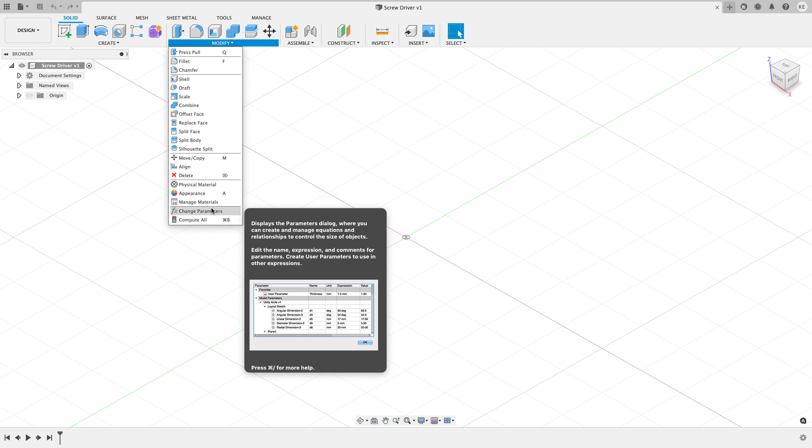Now I'm going to do a couple things before I get started. I want to create two parameters. From the modify menu, I'm going to choose change parameters, and when this menu comes up, I'm going to hit the plus. The two parameters I want to call are handle height, which I'll give a value of 2 inches, and shaft height, which I'll give a value of 2.25 inches. I'll hit OK. Now we really should add comments about what these do, but I'm going to skip that for the video, and I'll hit OK.

We'll reference those parameters later on in the design process. I know I'm going to have a handle component, and I know I'm going to have a shaft component, so right off the bat I'm going to start by creating components.

There's a couple ways you can do this. You can go to the assemble menu and choose new component. Because this is the way it's been done in Fusion for a long time, it's my muscle memory—a lot of times what I do is right click on my design name and choose new component. I'm going to use a standard component, and the name of this component is going to be handle. It's going to be underneath the parent, which is the design, and it's going to be activated once I hit OK.

The other thing I'm going to do right off the bat is go to the assemble menu and do an as-built joint. I'm going to click on the word handle in the browser, the component, and then the word origin. That's going to create a rigid joint between them.

Now I get asked a lot why I do that. Well, let's hop into another file. I'm just going to create a new component right off the bat, and I'm not even going to save it. If I draw something here, sort of like what we're going to do later on, let's draw a circle, and I'm going to extrude that.

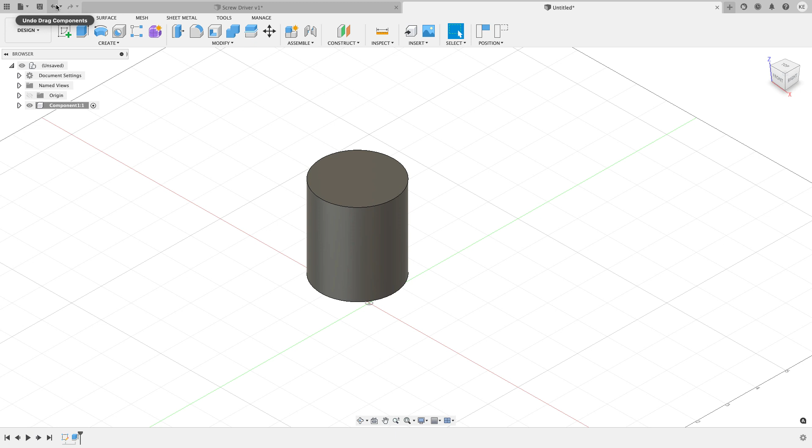When I do it this way, you can see that I can take that circle, this cylinder, and move it anywhere I want to. So I'm going to undo that and get it back to where it needs to be, revert that back. If I were to roll back to the very end and say assemble, and choose an as-built joint between the component and the origin, and then hit OK—that was the very first thing that I did.

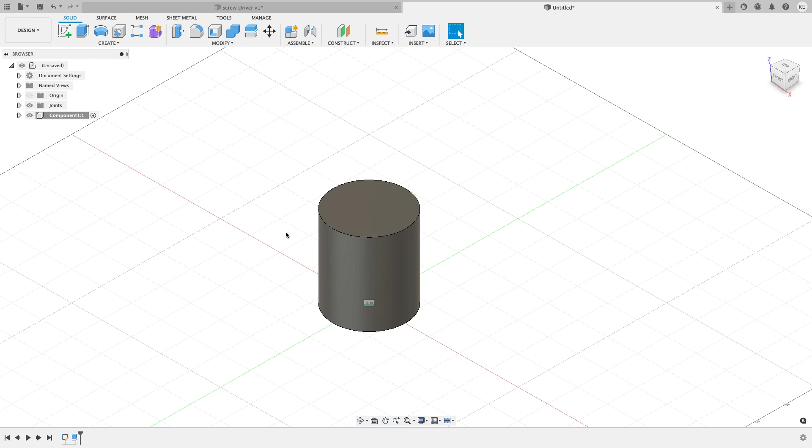Roll this to the end now. Now I can't move that cylinder anymore. So I know that the handle, I want it at the origin, so I'm just doing an as-built joint right away so that it can't move. I'll close this out and go back to my original design file. So I'm on my design file now. If seeing the joint symbol bothers you, you can turn off the joints folder, or you could turn off the individual joint that we just worked on.

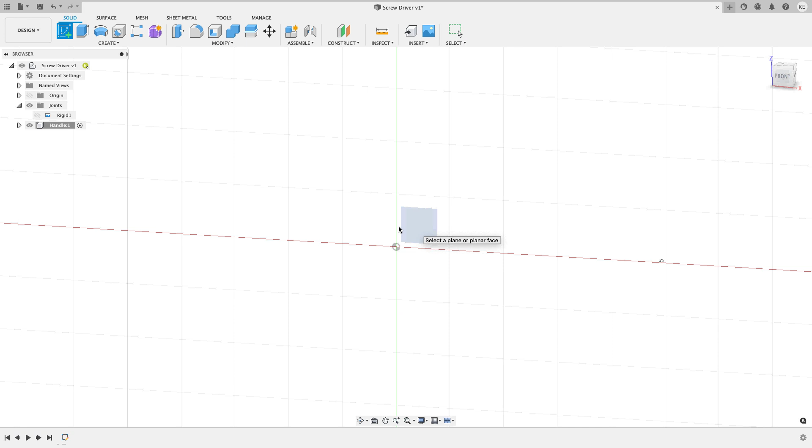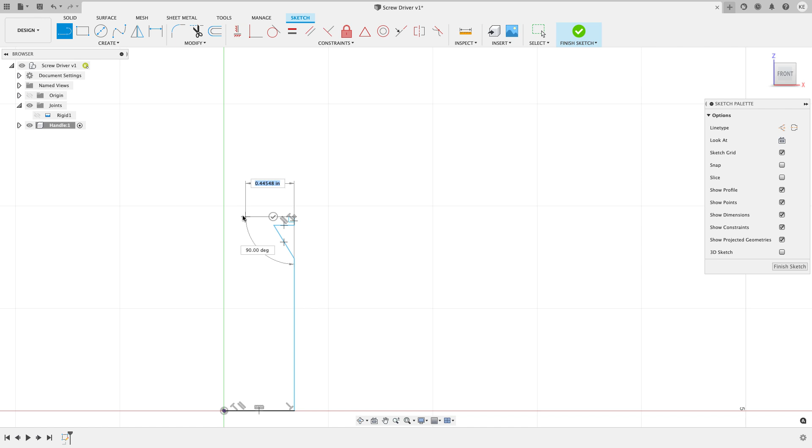I'm going to create a sketch now on the front plane, and we're going to work on drawing the handle shape. So I'm going to start the line command, and I'm just going to come over about that far, come up, angle in, angle back out, come straight up. Don't worry if you're not being completely perfect on these. Oftentimes I'll do what I just did there to close shapes up. I know I want this to be vertical when I'm done, but I drew it kind of as an angled line so that I visually can remember to come back and make sure to make that vertical. So I've got that taken care of—that's going to be my handle shape.

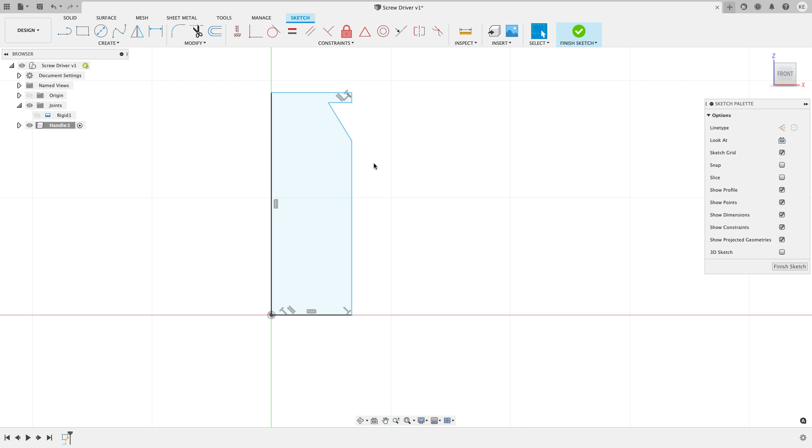I didn't do a great job on the sizing, but that's all right. We'll be able to fix all that in a minute. I'm going to start another line command, and this time I want to draw a center line, not construction, but center. So I'll go to the origin and just drag down, and that's going to make doing my dimensions a little bit easier.

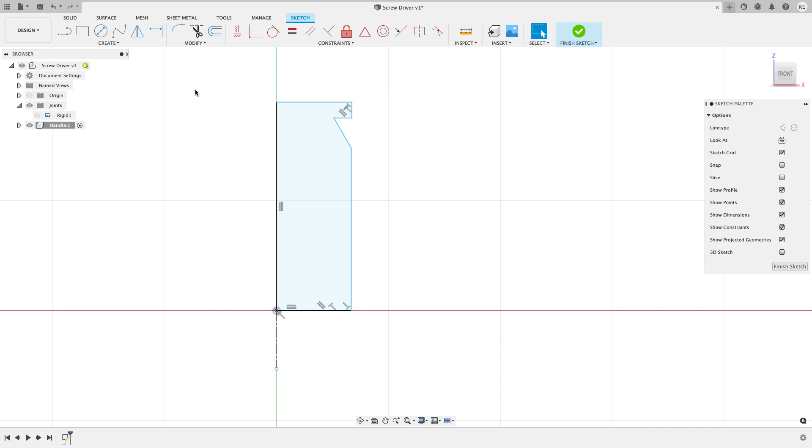Now I'm ready to start adding some dimensions. I'm going to start the dimension command, and I'm going to click on this center line and this outside dimension, and that's going to give me the total diameter of the part. I'll say that's going to be 1.125, and hit enter, and that creates my diameter dimension there.

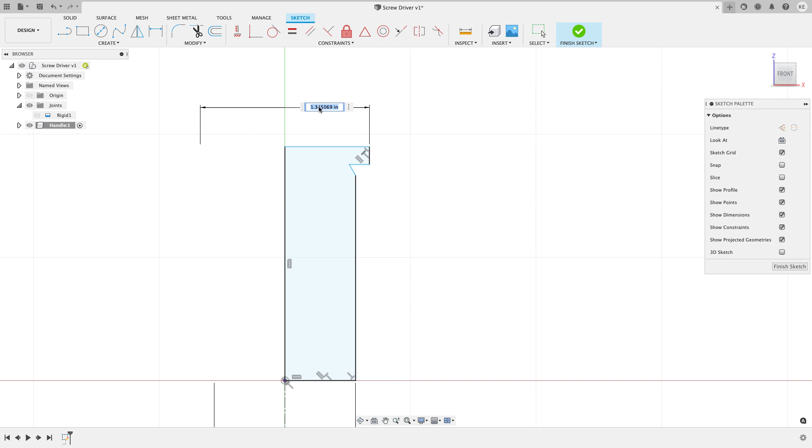I'll click on that center line again, and click on this upside dimension here, and call this 1 inch. So that gives me a 1 inch dimension. You see that things are sort of flipping around. That's okay. I'll just drag this in a little bit, and that's probably where I should have been a little bit more careful on getting the scale right on this. But you can see it wasn't too big of a deal.

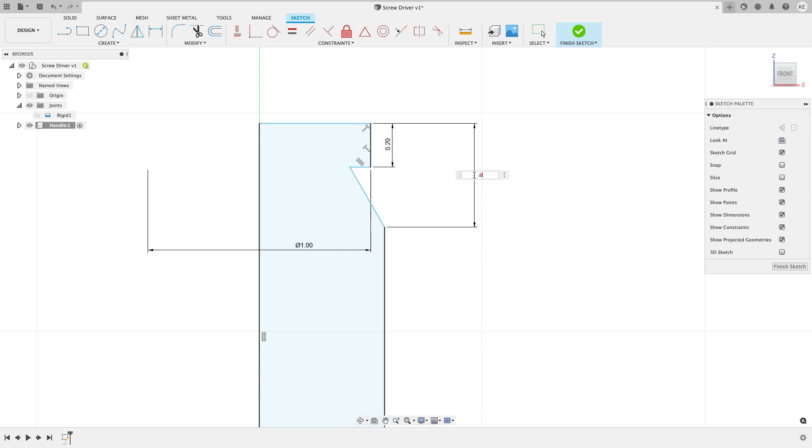So I'll dimension this to be 0.2 inches, and I'll dimension from here to here and call this 0.625 inches. Every time I move this around, it's just going to come back with the next dimension, so I should have probably just left it, but you get the idea.

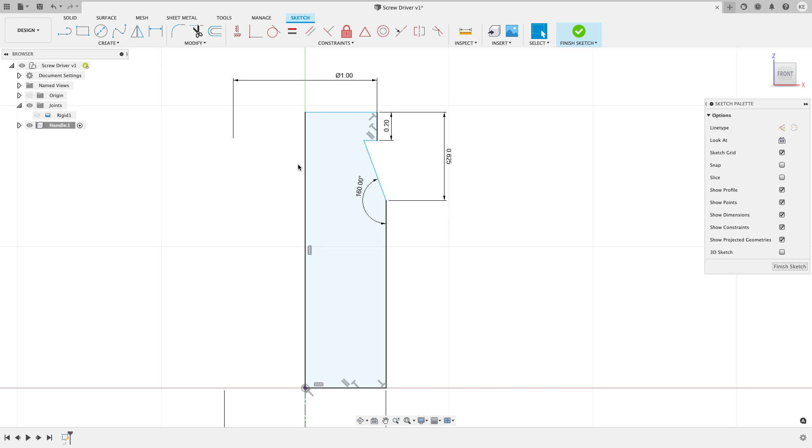I'm going to add one more dimension between here, and call this 160 degrees. And then I'm mostly done. The only place I have left is to define the total height, and I'm going to do a dimension here, and click that, but instead of typing the dimension in, I'm going to call this handle, and reference that handle height parameter, and hit enter.

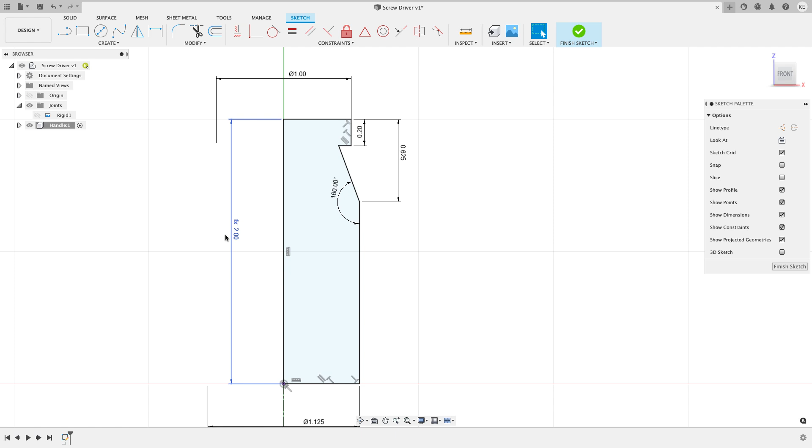Now that I've got all my dimensions on here, I can move these around and clean them up should I want to, kind of move them and reorganize them. I usually leave this step for the very end. So there's my original handle design. I'm going to go ahead and finish my sketch, go to a home view, click on the Revolve command, and choose my center line as my axis, and I get the basis of my handle so far.

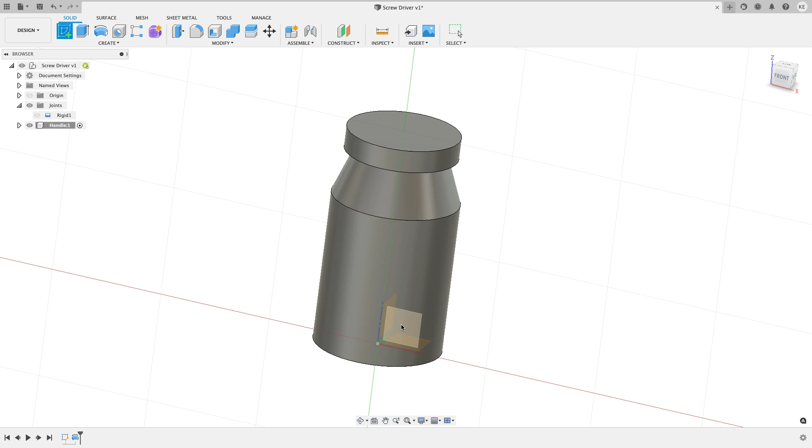Okay, for step 2, I'm going to put a little rounded corner down here, so I'm going to add a sketch, and put that sketch on the front plane. Once I get on the front plane, I'm going to slice this. Now I'm seeing wherever the solid body meets the plane that I put my sketch on, but I can't reference any of the lines. If I start the line command, it's not picking up on any of those edges. So I have to project those edges into my sketch first.

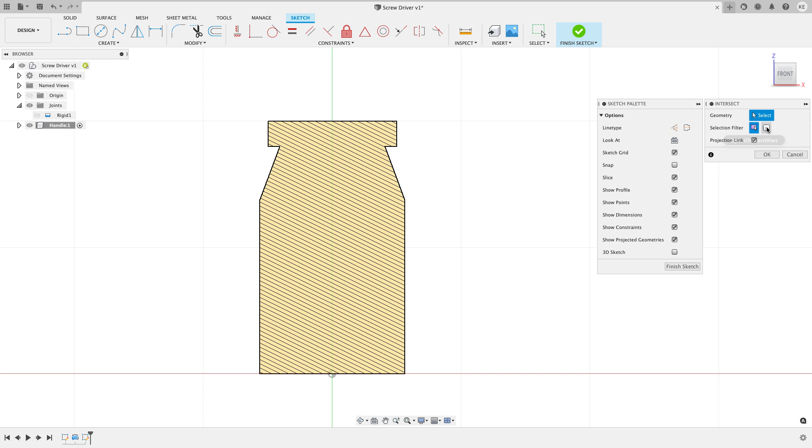So from the create menu, I'm going to go to project include, and this time I want to use the intersect option. In the filter over on the right, I want to change it from specified to body. So I'm going to go and change bodies, and I'll just click OK. And now what's happened is Fusion has projected in the outside profile of my handle.

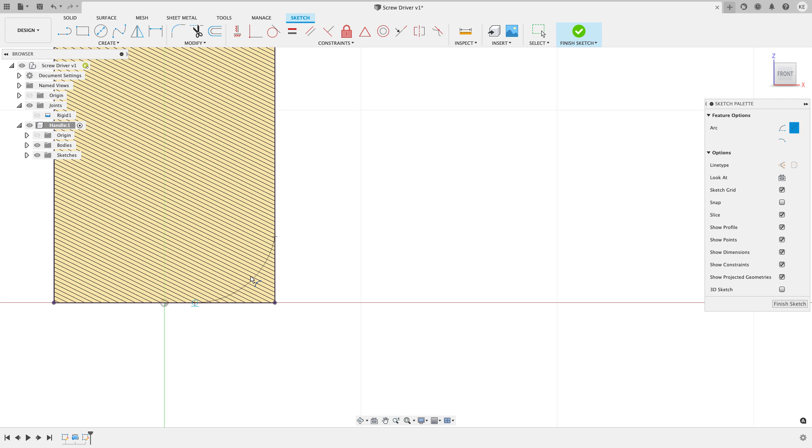And that allows me to go create an arc, a 3-point arc. I'll click on this bottom line and somewhere on this edge and kind of pull down a little bit. I don't want to see that tangent symbol there. I don't want a tangent symbol right there. This isn't going to be a perfect tangent on each edge.

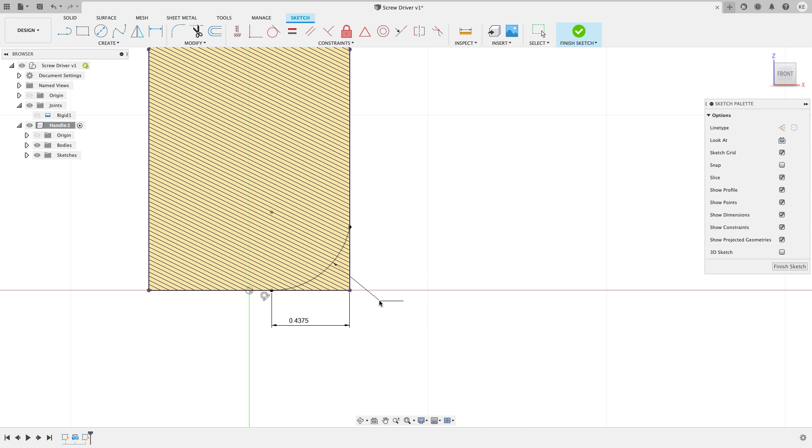So I'll add some dimensions now. The dimension that I want is going to be from here to here, 0.4375, and the radius is going to be 0.75. It turns fully black and constrained because there's only one arc that can be tangent to this bottom line, have a radius of 0.75, and a distance of 0.4375 away from the edge.

Now, a lot of times what we would do is we'd finish the sketch and do a revolve. There are 2 closed profiles that Fusion could choose between, so it can't automatically make the choice for me.

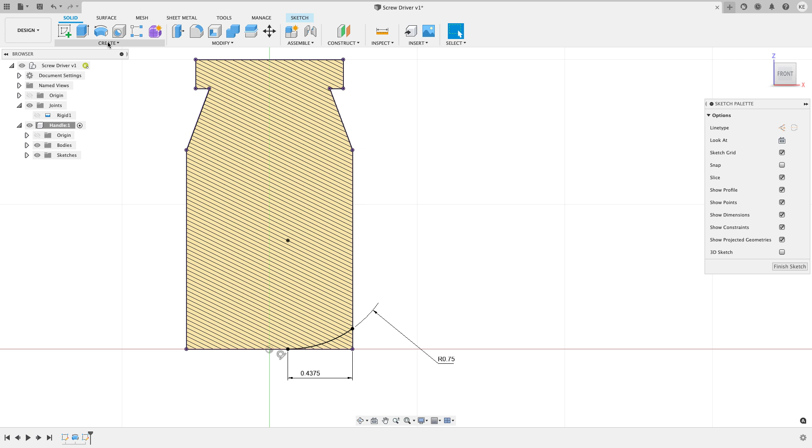Sometimes I'll go right to the solid tab, even though I'm still in a sketch, and choose the revolve command. Now it makes it really easy to grab that profile right there. Then I'll choose my axis, which I could choose the blue axis, or any solid round face will work.

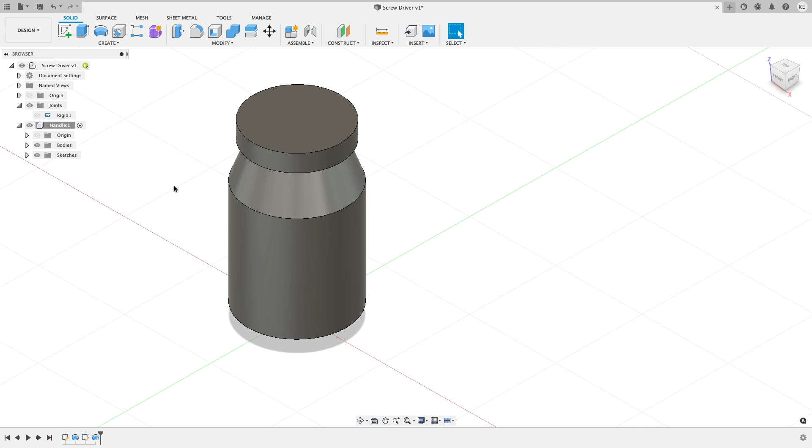That gets my cut, and I'll hit OK. Now I put a little cut around the bottom. To make my life a little easier, I usually try to leave fillets and chamfers until the very end, but I want to knock the edge off of this. So I'll go to the modify menu and choose the fillet command, click on this edge, and put a fillet radius on that edge of 0.25. We'll hit OK. My handle's starting to take shape pretty well.

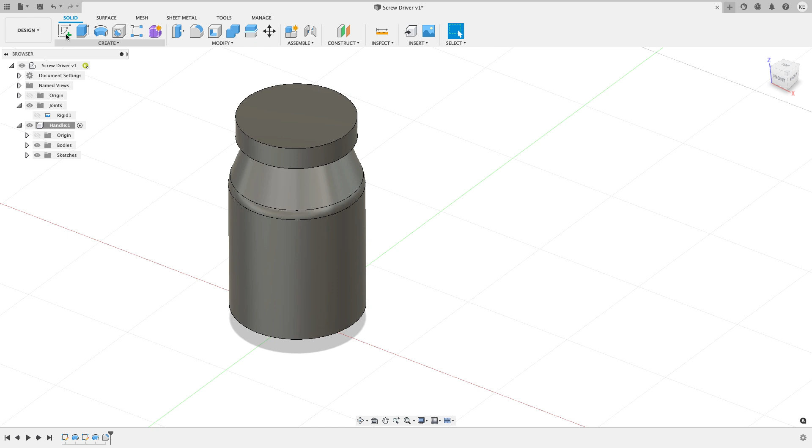I've got some holes that I want to put, kind of some little grips on the handle. So I'm going to put a sketch up on the top face, and I'm going to do a circle, but I want it to be construction. I'm going to start from the origin, and this diameter of the circle is going to be, I think, 2 inches.

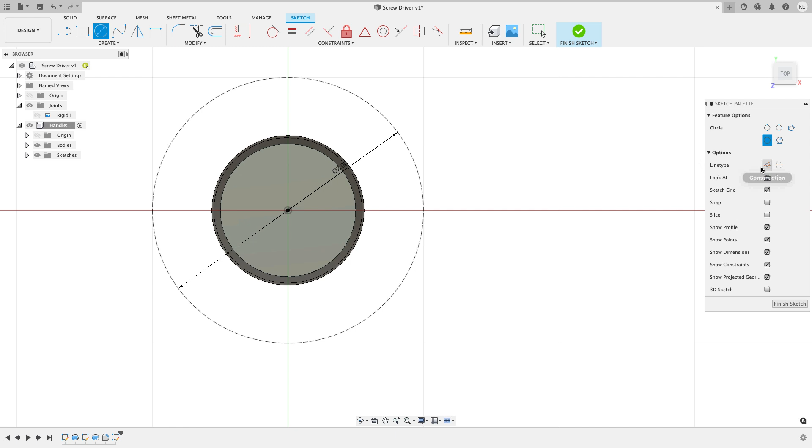So I'll put a 2-inch circle there. Then I'm going to come over here and draw another circle somewhere on the construction circle, but I don't want this one to be construction. I'm just going to drag this out - I'm not going to dimension it, just make it that size. The reason is that the dimension I've been given is a radius dimension, and I can't add a radius at the same time as I'm creating the circle. So now I'll right click and choose radius, left click to place it, and type in 0.5. Now I have my 0.5 inch circle.

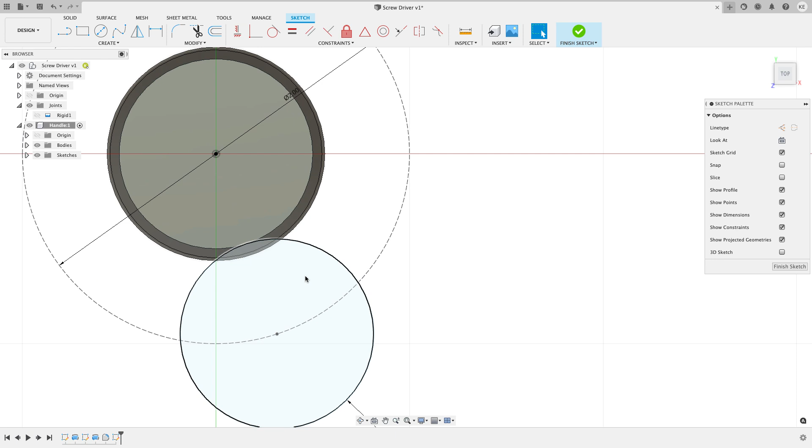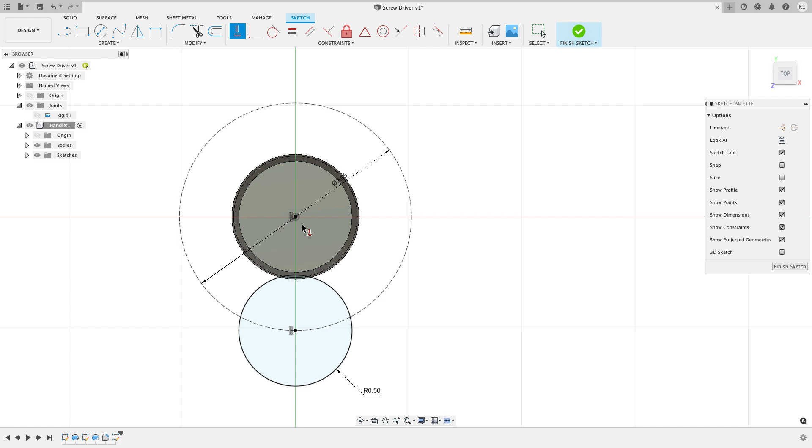I probably need to change the diameter of that a little bit - I don't want that to interfere with the top edge. So I'm just going to call this 2.05, let's go just a little bit larger. See, now it's outside of that. I'm going to add a horizontal vertical constraint between the origin and the dot in the center. Now that moves it into place, and you can see that everything is lined up where I want it to go.

I'll finish my sketch and rotate slightly. I'm going to extrude this circle, pull the direction I want to go until it starts to intersect, and then say I want to go through all. Hit OK, and there's one of the grip cuts that I'm going to have going through my handle right there.

Now I'm going to add a couple more fillets here, at least one more to start out with. So I'll fillet this edge, and that fillet radius is going to be 0.05. Now we've got a nice fillet going around there.

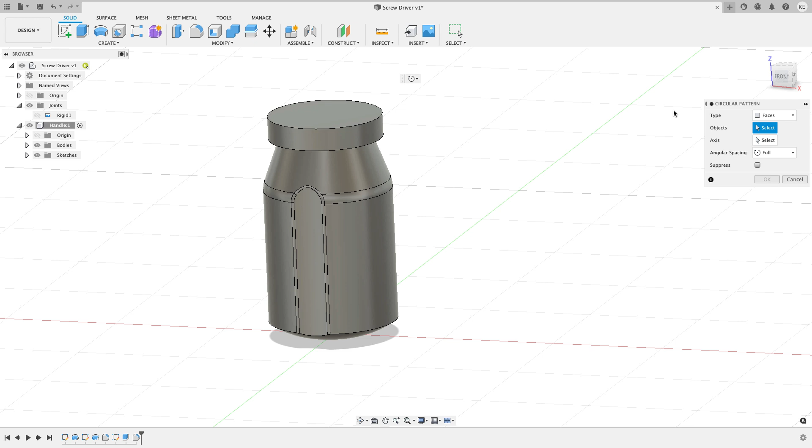I know I want 6 of these grips in total, and I don't want to do that 6 times. So instead, from the create menu, I'm going to choose to do a pattern and a circular pattern. Right now my feature type is set to faces - I gave the answer away there - I want it to be set to features.

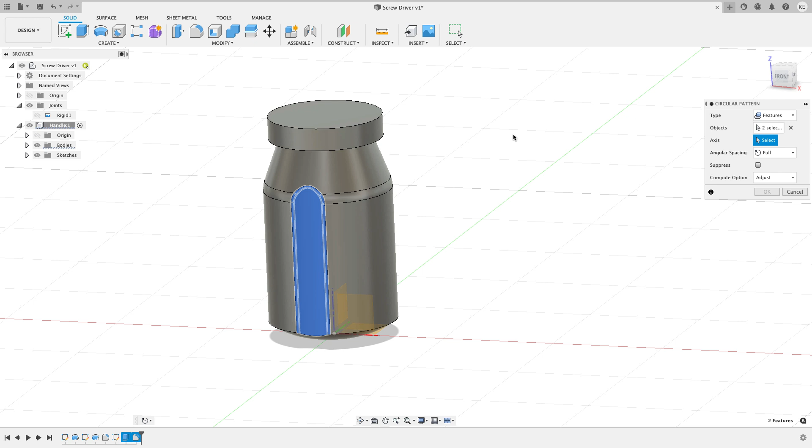So I'm going to select features, and I can click those features on the model, or select them from the timeline. I'm going to select mine from the timeline - you can select yours however you want. Again, for the axis, I just need to click on some round face, so I'll click on that edge and tell Fusion I'd like 6 of those. We'll hit OK, and now we get the fillet and the cut for the grips going around.

I'm going to do one more fillet across this, so I'll choose fillet one more time. I'm going to grab this bottom edge right here, and call this 0.025 just to round that corner off a little bit, and I'll hit OK.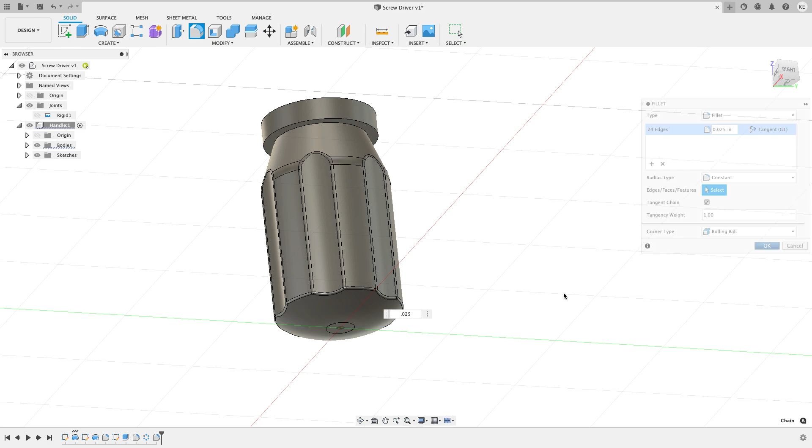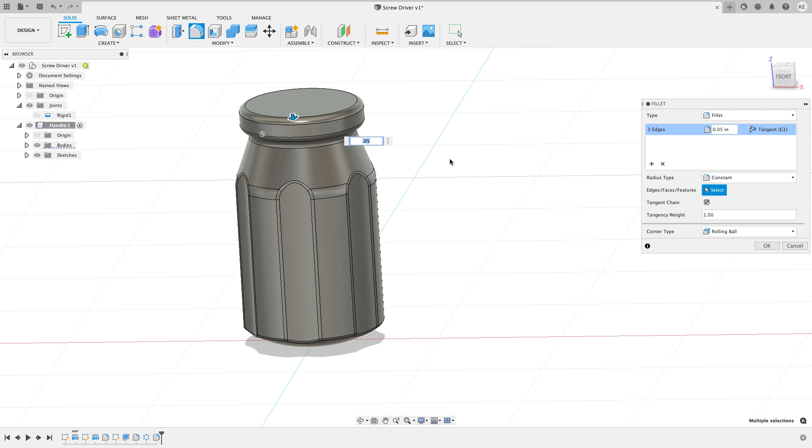And now I get all those edges rounded over. We'll do a different fillet radius. I want to grab this underside, this edge, and this edge, and give those a fillet radius of 0.05. You can see I get a pretty aesthetically pleasing shape right there, I think. So we'll hit OK.

And click on my home button. Really, one of the last things I want to do to this handle is put a hole in it where the shaft is going to go. So I'm going to use the hole command to do that.

I'm just going to click somewhere on this face. Now again, a lot of times what people try to do is they try to click right at the center. I'm going to encourage you to try to click off of where you want the hole to go so you can easily move the hole where you do want it to go. So I'll click right there. If I click on the blue dot, a white dot appears in the center. I'll drag those two together, it kind of snaps together, and now I can go start answering some of the questions.

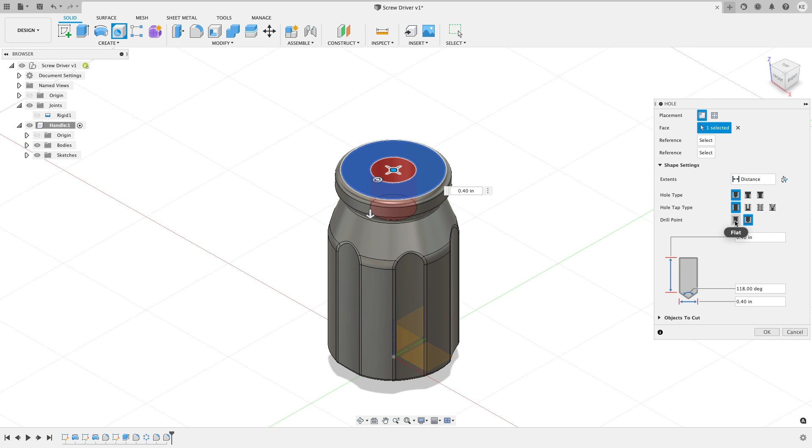I want the bottom of this hole to be flat, so I'm going to set that to be flat. And I want the depth of the hole to be 0.75. I'm also going to set the diameter of this hole to be 0.125.

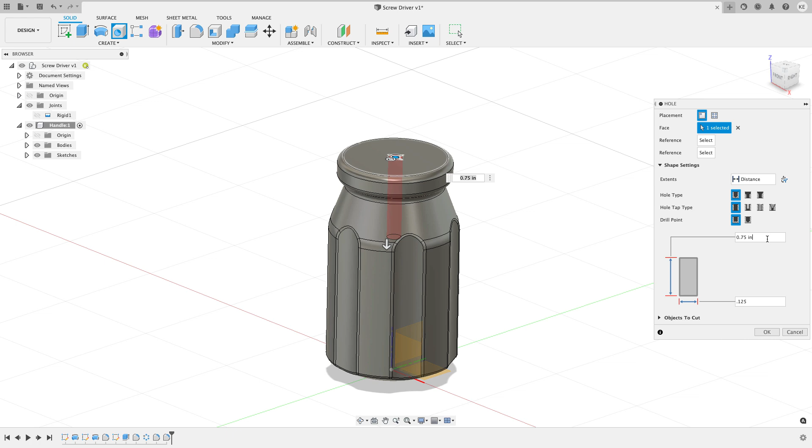So there's my 0.75 deep. That actually looks a little on the deep side, so let's just come and change this to be like 1/2 inch deep. That should be enough. And I'll hit OK.

So that's the basics for the geometry of the handle. Now, one of the things I note a lot too when I'm seeing things out on YouTube or Instagram or whatever is all the models are always gray. Our models don't always have to be gray. We can give them colors.

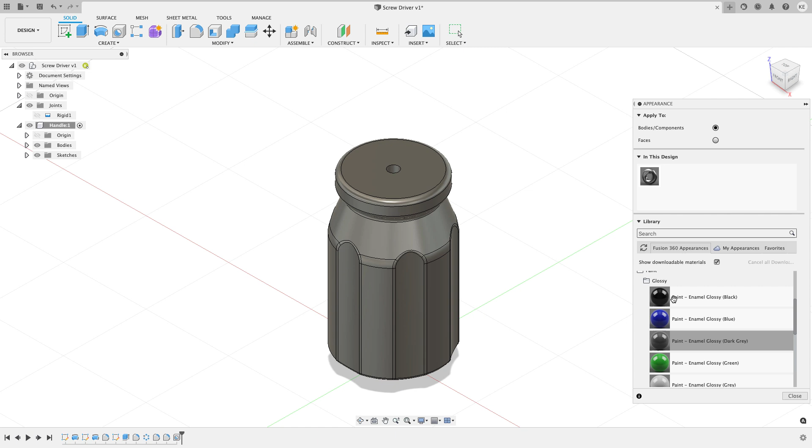So I'd like to change the appearance of this model by going to the modify menu, and then choose appearance. When this comes up, I want to go find any appearance that I want. I'm going to use paint for this, and I think I'll go to the glossy. I can drag any color that I want onto my handle, so I'm going to grab this yellow color and drag it on. Now you can see that my handle changes color to match.

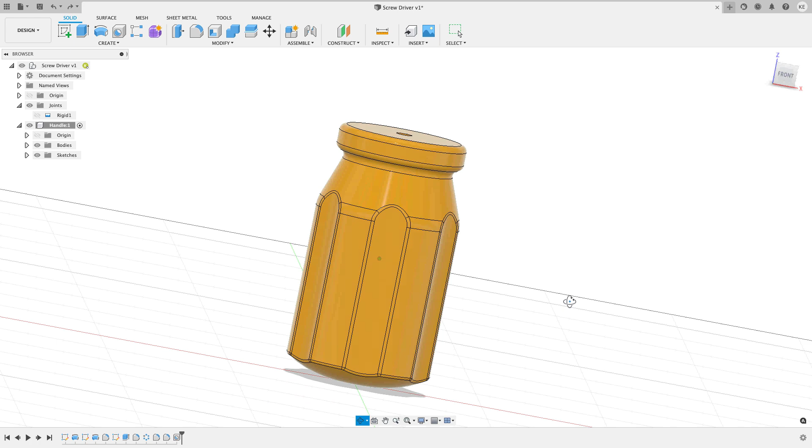I can give individual faces colors if I want to, so I just switch my selection filter to faces. If I really wanted to, I could go drag a color onto an individual face rather than having it applied to the entire body. I'll just undo that, I don't want that one face to be colored. So there's our handle. Handle's good.

Now it's time to start working on the shaft. So I'm going to activate my top level design again, and this time from the assemble menu, I'll say new component. This component is going to be named shaft. I'll hit OK, and now I'm ready to start doing some sketching for this.

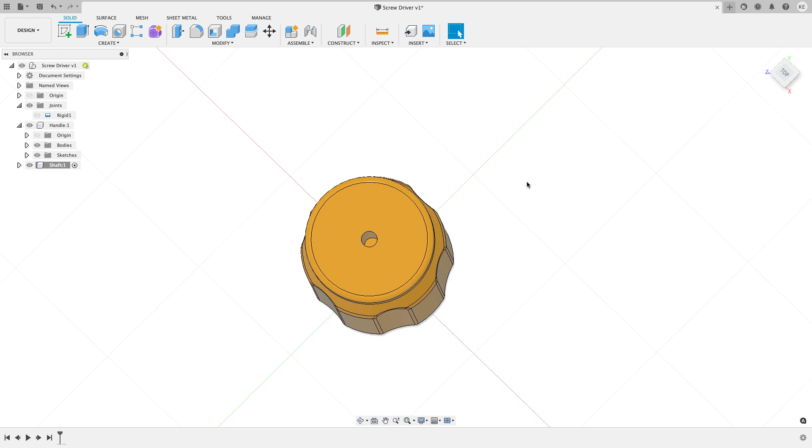So I'm going to create a sketch on the face at the bottom of that hole right there, and once I get that done, I'm going to finish my sketch. And now I can just extrude that, and I'm going to give this a shaft height dimension. I'll hit OK. So I've just created a relationship between the screwdriver shaft and the handle itself.

The handle is driving the geometry so that the shaft always fits in the handle. But again, if I click on the shaft and I drag it, it can move around anywhere it wants to. So I'm going to revert it.

I'm going to go to the assemble menu one more time and do an as-built joint. An as-built joint means that this thing is drawn exactly where I want it to be. There's no need to move it, it is where it needs to be. So I'm just going to click on the thing that can move, and then click on the thing that can't move. I'll click on the shaft, and then click on the handle, and it's going to add a joint between those two.

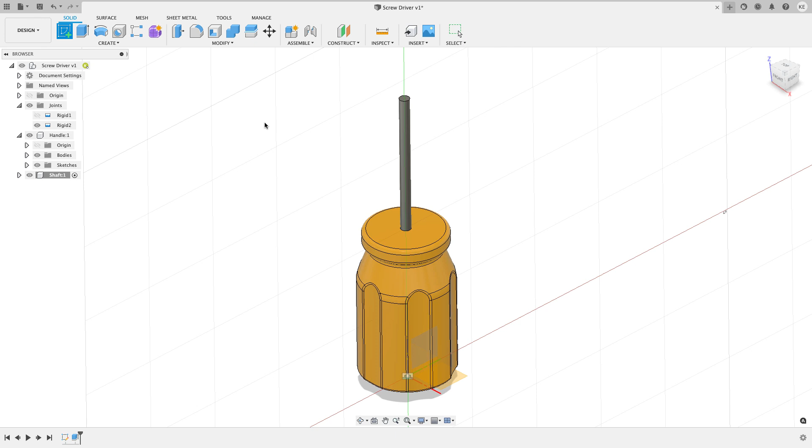Now I can't move that around anymore. I want to put a point on the end of the shaft, so I'm going to create a sketch on the front plane. Once I get that located, I'm going to slice my geometry. I'll go to create, project/include, intersect, and it should already be set to bodies from last time. I'll click on this and hit OK.

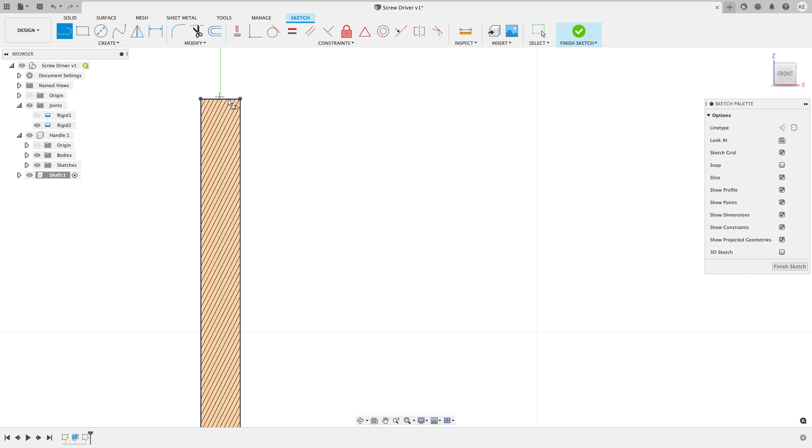Now for this, I'm just going to draw a line from the edge and down. The only place I don't want to be is exactly at the middle of this line, so you see I'm off by a little bit. I want the distance from the center point of this edge to the end point of that line to be 0.010 of an inch.

Now that's a little tricky because there's nothing there that I can dimension to. So what a lot of people will do is come and put a point, or draw a line and use the midpoint. There's maybe a faster way you can do this that's more automated.

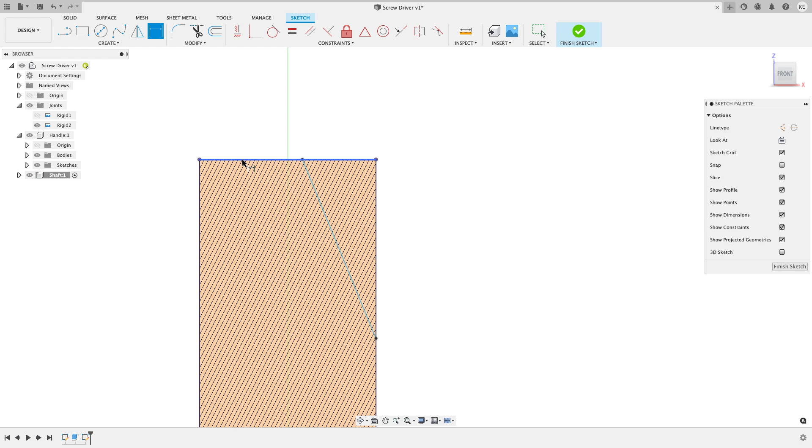I'm just going to start the dimension command and hold down my shift button as I scrub along this edge. Eventually Fusion will find the midpoint. I'll click on there and click on the endpoint of the line, and set this to be 0.01 — 0.01 is what I meant. Fusion will automatically add that point for me, and put it at the midpoint all in one shot. I didn't have to do anything to make that happen. It just sort of did.

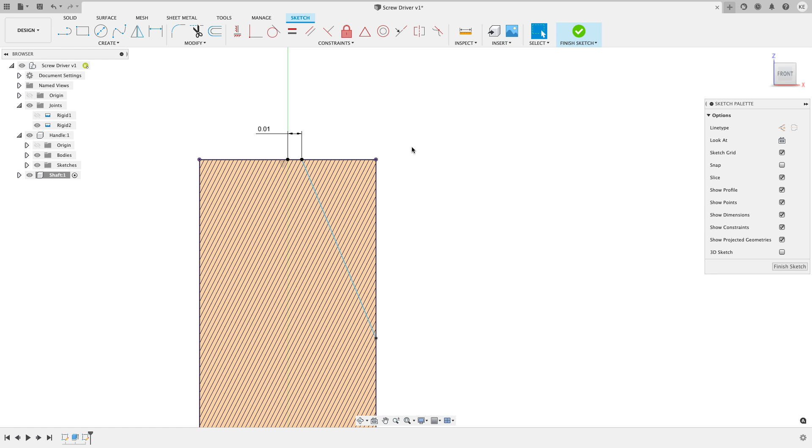I have one more dimension that I have to do. I'm going to hit D for dimension to get into the dimension command, click on that point, and that value is going to be 0.125. That's going to be fully black and defined.

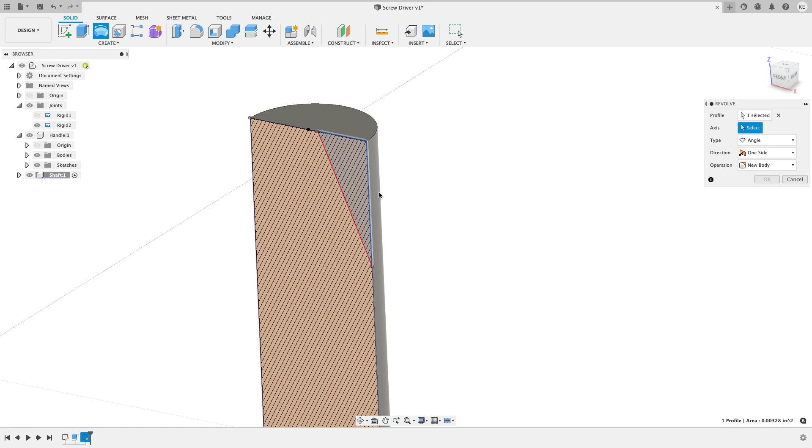Again, if I want to, I can just go back to the solid tab, choose a revolve command, pick my profile, pick on my outside face, and Fusion's going to rotate that around and cut the end of that. So we're starting to get a little closer to the shape of the screwdriver that I want.

I'm going to put a sketch up on this top face. Now what I want to do is draw the cut where this is going to go into the bit. There are a couple of different ways we could do this, but I'm just going to kind of draw a triangle.

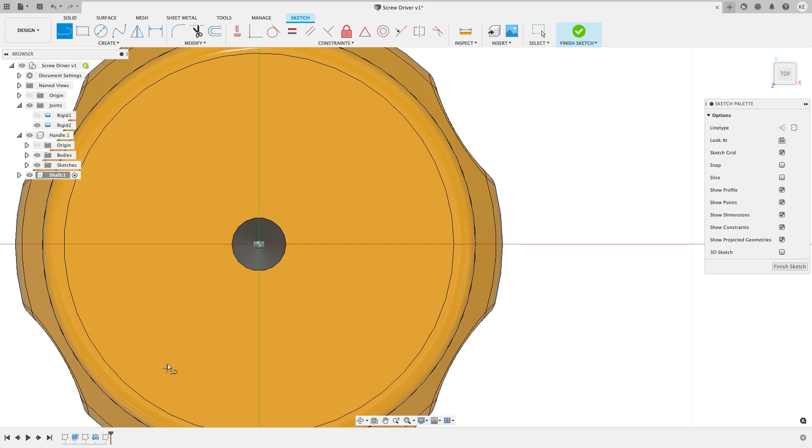So I'm going to bring a triangle in. When I get to where I want this to end, I'm going to have a radius end on it. I'll left click and hold, and swing into an arc. Don't worry that our arc is really large compared to what I want right now — I'll just kind of drag this back out. I know this is going to go down pretty far, so I'm going to drag both sides back out.

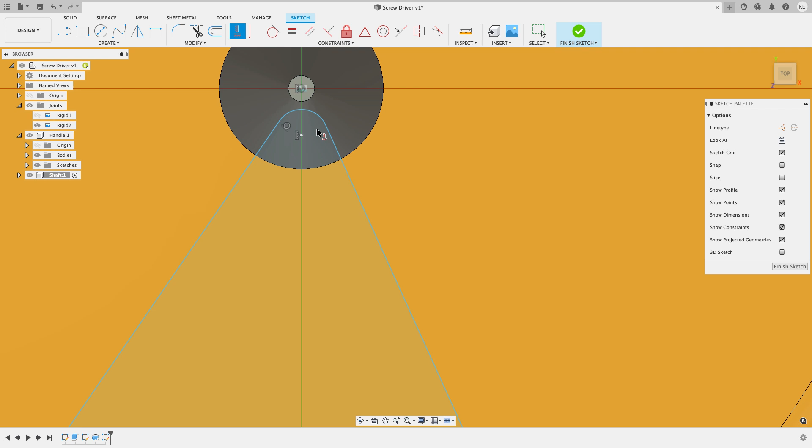Then I want a line that connects them. I don't really care if it's horizontal or vertical right now — I'll fix that with a horizontal constraint to get that where I want it. I know the center of this is going to be lined up with the origin, so I'm just going to put that on there now. I fully expect... I thought it would have broken a little bit more, but it stayed together pretty well.

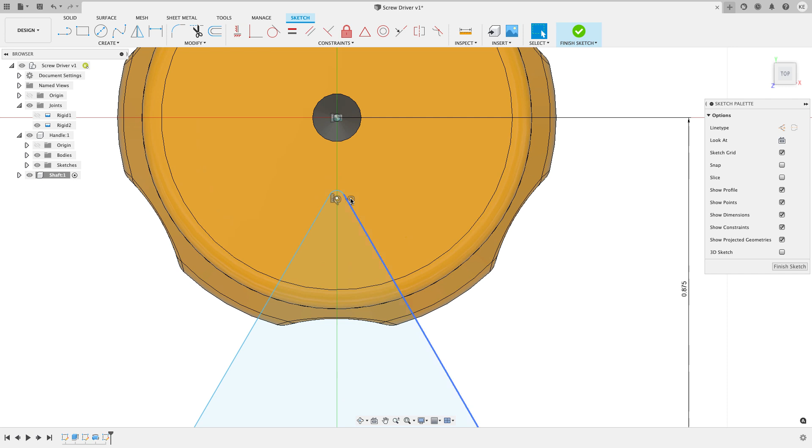I also know I want a tangent constraint right there. So we're good there. I can just start dragging these things around a little bit to get it more into place. I'm going to add a dimension — D for dimension — between the origin and the bottom line here, and that dimension is going to be 0.875. That moves things around, but I can just drag things back if I need to, grabbing the whole thing and moving it closer to where I want it.

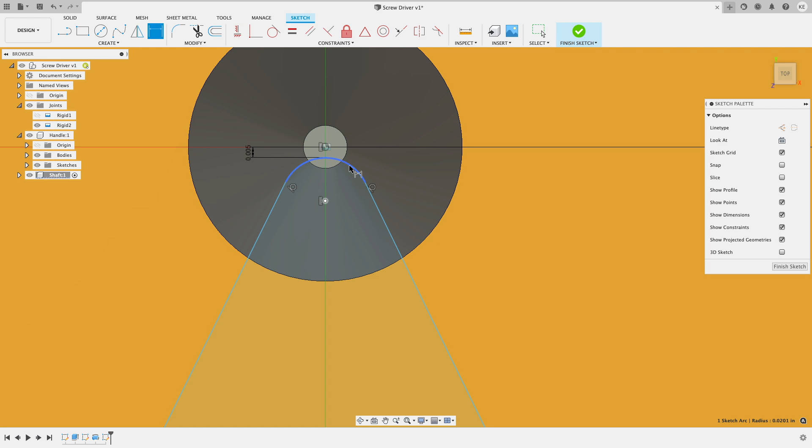Maybe I'll start adding some dimensions. I'm going to dimension between the origin and the tangent point of this arc. To do that, I'll right click and say pick circle arc tangent, then click on that arc, and I'll set 0.005 for that distance. I also want the radius of this arc to be 0.005, so I'll click on that.

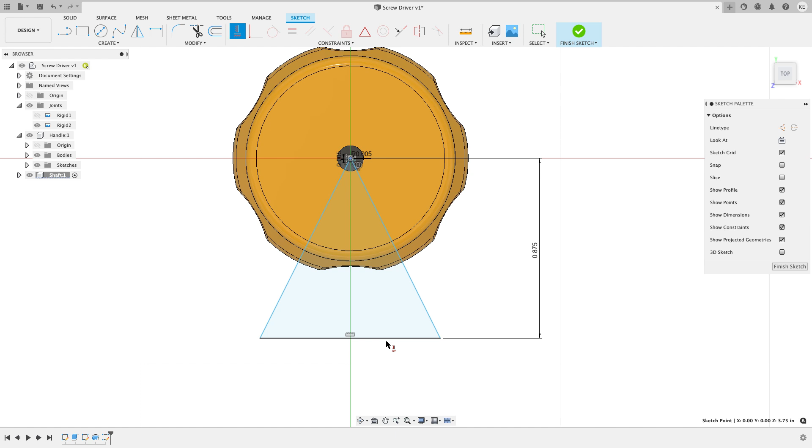So things are starting to work pretty well. I know I want this to be perfectly symmetrical on each side of the green line. To do that, I'm going to add another horizontal vertical between the origin dot, and I'll hold down my shift button as I scrub across this bottom line until I find the midpoint and click on that.

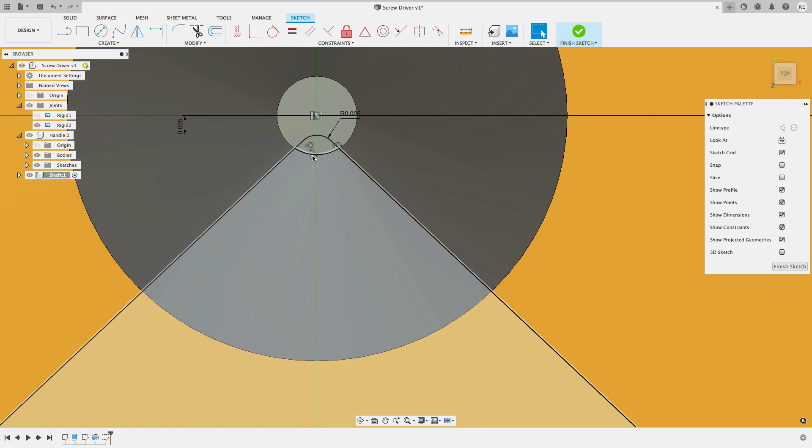Now, no matter how I change this, it's going to change it symmetrically on both sides. I'll add a dimension, so I did D for dimension, click on this line, and it's going to be 92.5 degrees. I'll hit enter, and now we'll see that everything is black and fully defined. That's going to be what makes my Phillips head on this shaft.

I'm going to finish my sketch, and I'm going to kind of rotate around. Now this time, I want to do the revolve command one more time. I want to click on that profile. Make sure you zoom in and you get this little chunk right there as well. We need both of those for this to work.

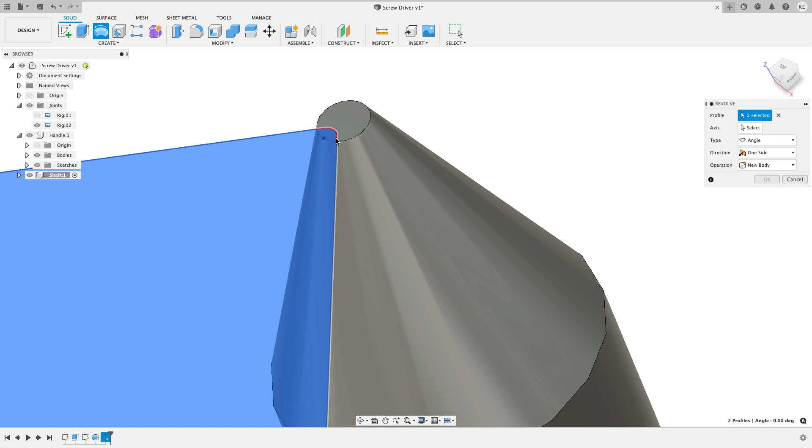Actually, we probably only need that one down there, but we're going to use both of them. Now for the axis, I'm just going to click on this edge right here. So lots of people think the rotation edge also has to be on the model, but any edge will work. I'll click on that, and we'll do a full 360 degrees of rotation, and hit OK. And there we get one of the cuts that we're going to do.

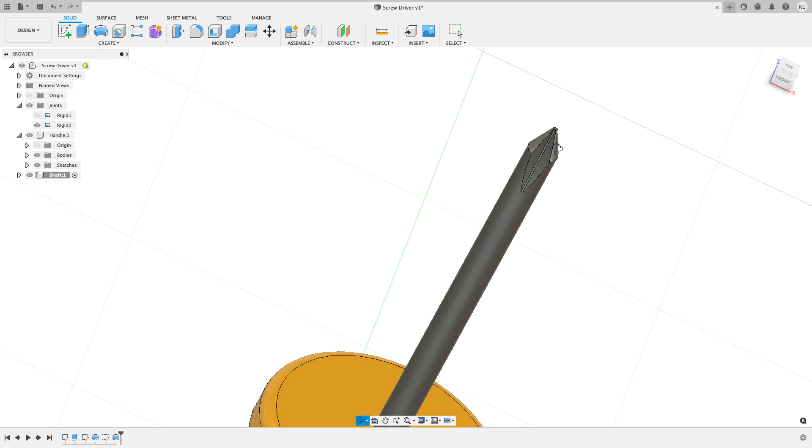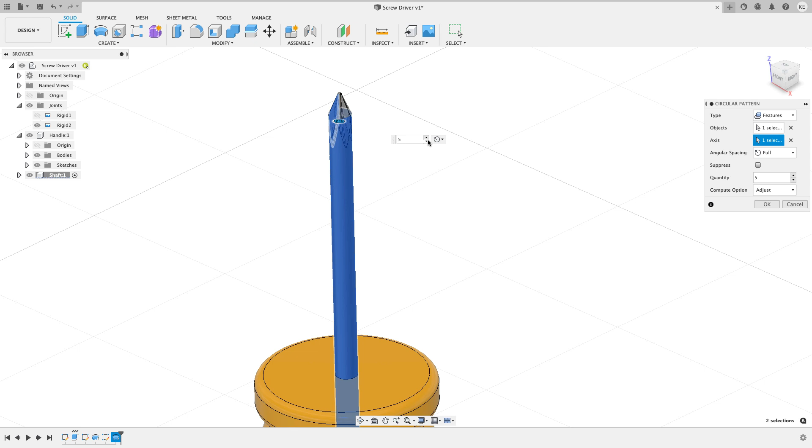To complete this shaft, I'm going to say modify—sorry, I'm going to say create pattern and circular pattern. Again, I want to pattern features. I can grab the cut right on the model. I could have grabbed it on the timeline as well. For the axis, I'll just click on the shaft and tell Fusion I'd like 4 of these this time, and I'll hit OK. And there we have our Phillips head screwdriver.

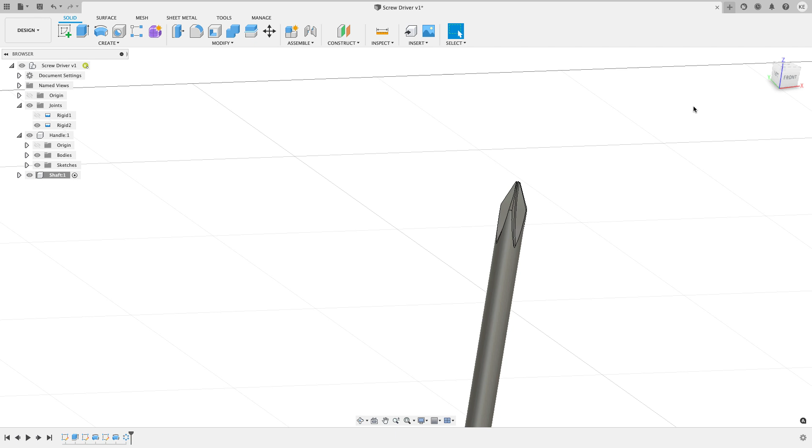I don't know if the dimensions for this Phillips head are exactly right, but the methodology of creating the geometry here should work out. So we've got our little Phillips head screwdriver, and that's the way that I go about creating it. Now in the very beginning, you may recall that I added some parameters.

I'm going to go back and activate my top level design. I added some parameters because I might want to make variations of this. I'm going to hit save. I can do a file save as, but I'm not going to—I'm just going to go change the original.

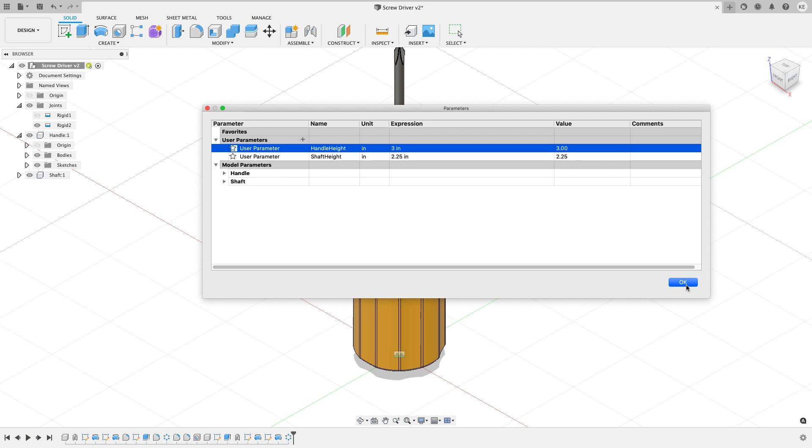If I went to modify and change parameters, I could come to this handle height and maybe change this to be 3. Now if I hit OK, you see that my handle got taller.

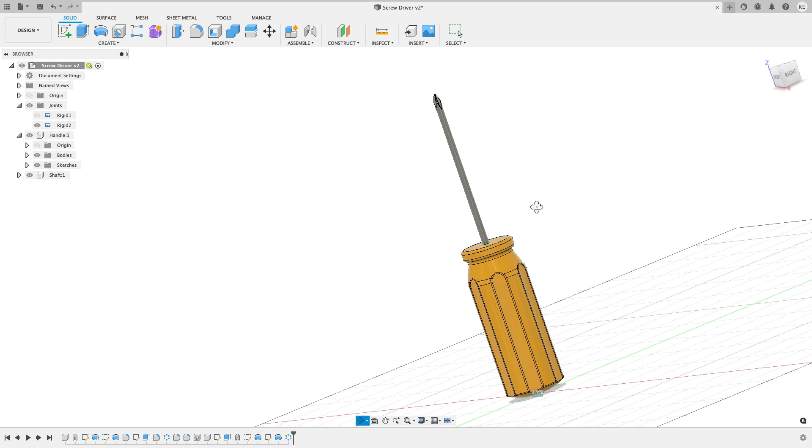If I said modify, change parameters one more time, I could go to my shaft height and say I want that to be 3.5, and I'll hit OK. Now, changing those 2 dimensions, I got somewhat the same shape to the screwdriver, but different lengths for the shaft and different lengths for the handle, while the rest of the geometry all kind of matches.

So if you've ever looked at a screwdriver set, they all sort of have the same profile—they just have different sizes. We could change the diameters. We could do anything we want to at this point. You just have to add more parameters if we wanted to do it in a more automated way.